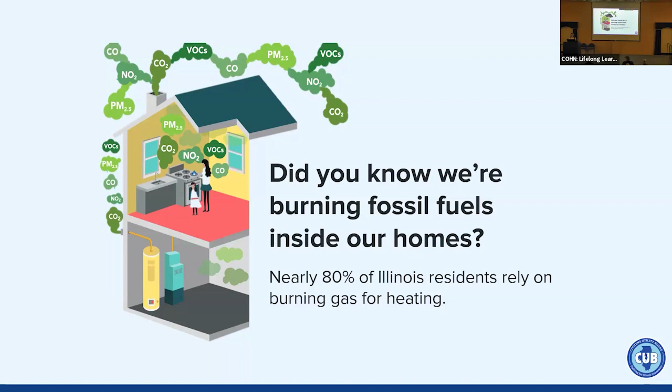There are 4 main ways that we do this inside of our home: space heating, water heating, cooking, and clothes drying. Obviously, the big ticket item there is going to be space heating, so that's the biggest way that we burn fossil fuels inside of our homes.

So what is building decarbonization? That may be a term that you've heard before. I've mentioned it a few times today. What it means is ensuring that the energy we use to power and heat our buildings doesn't result in further greenhouse gas emissions. This is really important for our emission goals and our climate goals because roughly two-thirds of our state's emissions come from buildings. So that's a really big portion of our emissions, right?

One way to do this is to electrify our homes and decarbonize our homes. Now, this is not a perfect fix, right? Our electricity grid is far from perfect and far from clean, but we are on a pathway to clean it up. There are pieces of legislation in Illinois, like the Climate and Equitable Jobs Act that passed in 2021, that put us on a path to achieve a carbon-free power sector by 2045. I think we're a little bit behind meeting those goals, but it's something we're working towards.

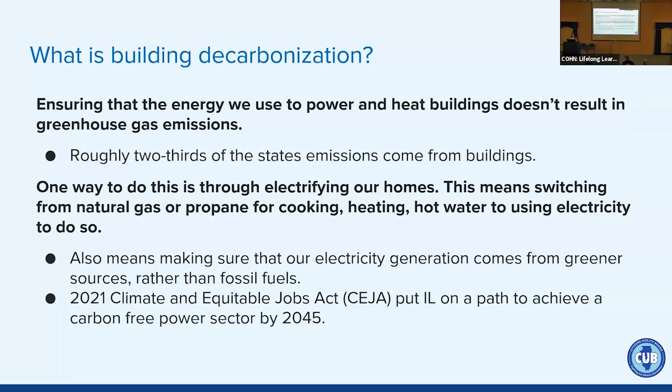So one way to reduce your greenhouse gas emissions in your home is through electrifying. I want to go over some of the main reasons you might be interested in decarbonizing. The 3 big ones are affordability, climate change, and your health. We'll go over these a little bit more in depth.

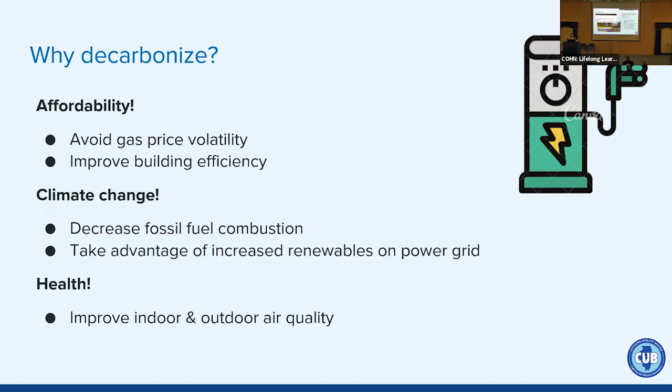So the first reason is affordability. Gas is expensive, not only the gas that we're using in our buildings, but the gas system itself is really expensive. We have some of the highest fixed fees in the Midwest here in Illinois. That's the amount you're paying regardless of how much gas you're using. In Peoples Gas territory and in Nicor Gas territory, it's about $30-$40 that you're paying a month, even if you were to use no gas.

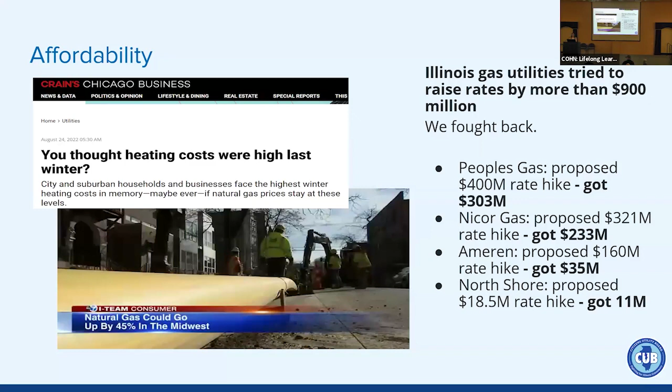Last year, Illinois gas utilities tried to raise our rates by more than $900 million. That's an immense and a record rate hike in the state of Illinois. Organizations like CUB fought back. We were able to rein in some of their spending, but as you can see, these are still incredibly high rate hikes. So we know that our gas system is old, it's inefficient, and it's unaffordable for a lot of people.

Another reason you might be interested in decarbonizing your home is for climate change. That's because natural gas is made up of predominantly methane, and methane has an incredible global warming capacity, over 84 times the global warming potential of CO2 over a 20-year time frame. Because our building sector is such a huge portion of our state's emissions, tackling the building sector is going to be really key to tackling climate change.

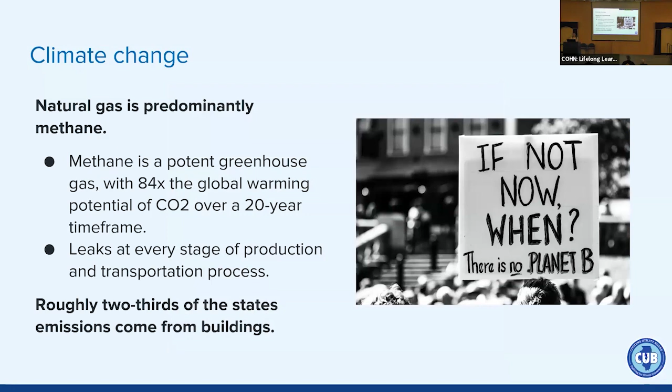The third reason is for cleaner indoor air. Gas burning appliances like your stove and water heater emit dangerous air pollution into our indoor air. This is things like nitrogen oxide, carbon monoxide, general particulate matter, formaldehyde, and benzene. And 21% of childhood asthma cases in Illinois are attributable to gas stove usage. That is the highest of any state in the nation.

I think this makes sense, right? Children are small, their lungs are smaller, they're spending a lot of time indoors, and so they are more susceptible. But that doesn't mean that burning gas inside of our homes isn't harmful for the rest of us as well.

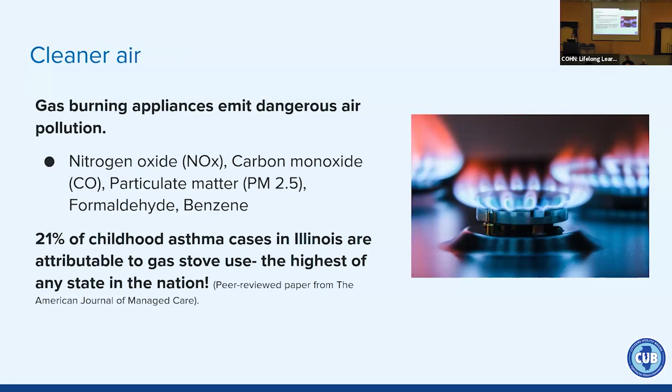But it's not all doom and gloom, don't worry. I'm going to go over geothermal specifically today, which is one of the technologies that we have to move beyond gas. There are 4 main ways that we burn fossil fuels inside of our homes: for space heating, for cooking, for water heating, and for clothes drying. We have the technology available on the market to transition away from these gas burning alternatives.

As you can see, their electric counterparts look really similar. So you can start to see how you might be able to swap out appliances you have at home, gas burning ones, for electric ones.

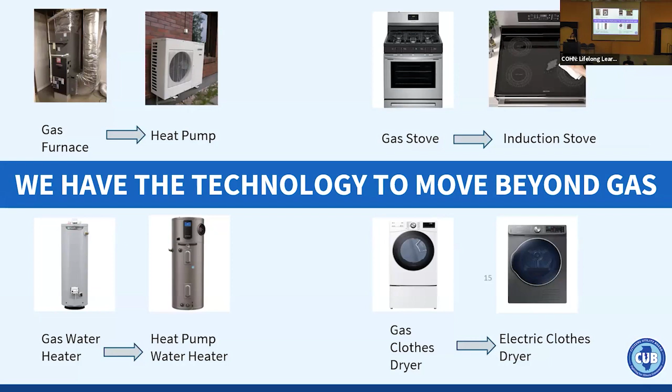Okay, heat pumps. I want to go over the very basics of how a heat pump works, and then we'll talk a little bit more specifically about ground source heat pumps, which is also sometimes called geothermal. So heat pumps, instead of burning a fuel to generate heat, simply move it from one location, called the source, to another location.

There are 2 main types of heat pumps: ground source and air source, and they both work really similarly. The major difference is that source we talked about, or where heat is being drawn from. That's either going to be from the air or from the ground, like the name implies. There are other technologies inside of our home that utilize this idea of moving heat or cooling from one side to the other rather than generating it.

One example is your refrigerator. Your refrigerator moves hot air from inside to the outside of the refrigerator, which is why on the back of the refrigerator, or at the side, it's a little warmer. That's because it's pushing that hot air out from the refrigerator into your kitchen.

So these technologies are not new, and heat pumps are going to be best suited for buildings with ducted and forced air systems. It's not impossible for other systems like radiator heating or floor heating, but it is going to be best suited and a more simple swap out if you have forced air.

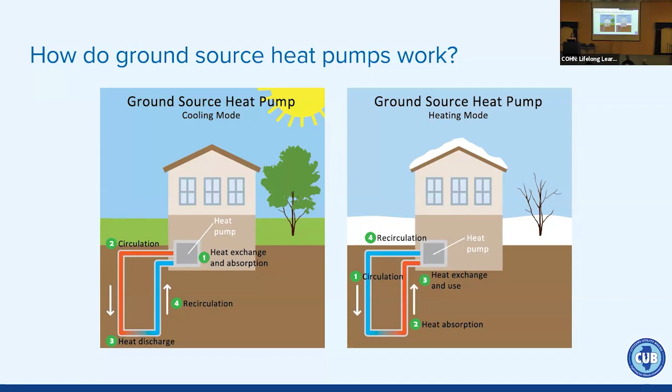Of course, these systems are a little bit more expensive. You have to first even think about digging these gigantic holes into the ground, and that's going to create a big barrier for a lot of people. But we're going to talk about how you might go about financing these types of projects in a minute.

But before we go, we cannot talk about heat pumps, we can't talk about decarbonization, without also talking about energy efficiency. That is because the cheapest and the cleanest energy is the energy that you simply don't use. The NRDC released a study that said every dollar spent on efficiency saves you $3 in energy costs, so it's a good investment of your money.

What might energy efficiency look like? It might look like weatherizing your home, using energy efficient lighting, unplugging your appliances when you go on vacation, utilizing your programmable thermostat, things like that. These are all things we can do to improve our energy efficiency. That's going to allow our electric appliances to run at their full capacity, use less electricity to begin with, and ultimately benefit our health, our wallets, and our environments.

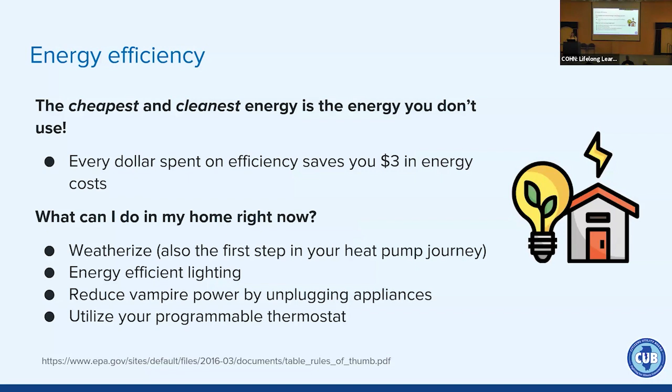If you are like, oh my God, I'm so excited about geothermal energy, I'm so excited about heat pumps, where do I start? This would be the place to start. It is called a home energy audit. It's going to make sure that your home has good insulation, that your building envelope is really tight, so that your electricity bills don't skyrocket when you switch over.

So this is a service. It should cost you a couple hundred dollars. There are also tax credits for it that we'll be going over shortly, don't worry, to help you subsidize that cost. But this is a really in-depth understanding and assessment of your home.

A home energy audit might tell you, oh, in your home, you're losing a vast majority of your energy through your windows. So then you would know, before I'm thinking about getting a geothermal heat pump or some other sort of heat pump, I really need to address the leakage happening in my windows. So this will give you a really good sense of where your building stands, especially if you live in an older, less efficient building. This is a really important first step to make sure those bills don't skyrocket when you switch over to electricity.

Okay, sorry to stick a chart at you so early in the morning. I know this is a little bit complex, but these are all of the consumer-facing tax credits and rebates available through the IRA, the Inflation Reduction Act. It passed in 2022. It is a very large investment to tackle the climate crisis and invest in clean energy across the country. These incentives, along with state incentives and utility incentives, are going to make the next couple of years some of the best times to make energy and efficiency upgrades to your home.

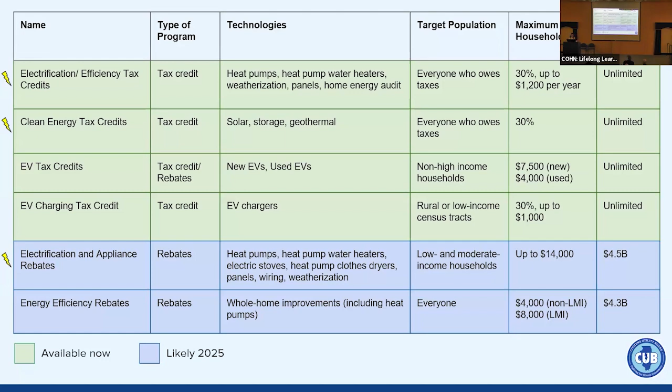We just talked about how important energy efficiency and weatherization is when you think about decarbonizing your home. This is the tax credit that helps subsidize those costs. Starting January 2023, and for each year for the next decade, all consumers can claim a tax credit for 30% of the cost of qualified projects, up to $1,200 annually. If you had multiple little things you needed to do in sequence, you could split up those projects over multiple years and access this credit.

So these are the caps. Of course, this is not tax guidance—I'm not a CPA, I'm just providing general guidance provided to us by the IRS. If you are planning on accessing any of these incentives, you should go on the IRS website and check with your tax person to make sure all the nuts and bolts are figured out.

There's also an additional one-time $2,000 tax credit for upgrading a space or water heater that does not count towards the annual tax credit. That means for 9 years you could qualify for the $1,200, and for 1 year you could claim that annual credit plus the one-time credit, for a total credit of $3,200.

The next is the residential clean energy tax credit, which includes geothermal heat pumps, the technology we just talked about. Starting January 2023, and for each year for the next decade, all consumers can claim a tax credit for 30% of the cost of qualified projects. You'll notice this does not have an annual cap. The credit percentage will phase down to 26% in 2033, and then they're looking to scale it down further.

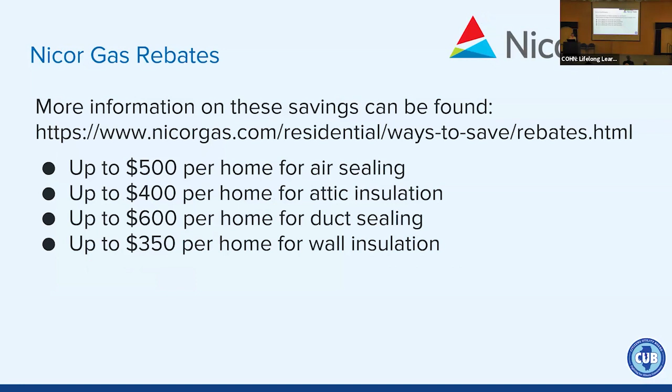Now, you may have heard of something called direct pay, which the proper term is elective pay, but most people say direct pay. Direct pay is part of the IRA, and for the first time, it allows tax-exempt and governmental entities to receive a payment equal to the full value of the tax credit for buildings qualifying in clean energy projects. In general, an applicable entity can use elective pay with respect to these 12 credits as long as it meets the tax credit's underlying requirements. There's many tax credits through the IRA, but only 12 of them are eligible for direct pay.

The steps for direct pay are a little bit different. So if you were thinking of a project for your house of worship or another tax-exempt entity, you would first identify the project and the credit you want to use, complete the project, place it into service, determine when that tax return will be due, and then you have to pre-file registration with the IRS before the tax return is due. Once you receive the registration number, you'll need that number to file the taxes for your tax-exempt entity, and then you would receive a direct payment for the amount that you've qualified for.

Okay, so these are just some of the energy generation and carbon capture tax credits that can be taken advantage of for tax-exempt entities. So if you are looking at something like geothermal, you would be looking at the investment tax credit for energy property.

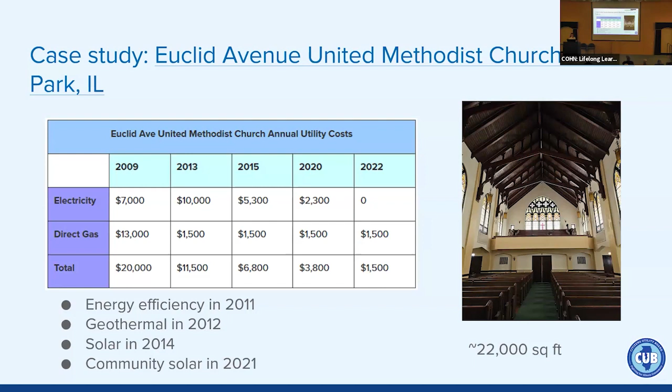And it covers a portion of their building's heating and cooling, which helps alleviate the gas burden as well as emissions, as well as some of the schools in the Glencoe School District. I know West Elementary School maintains around 40 wells alone. That sounds like maybe enough to do a whole wing of a building, but I'm not exactly sure—I couldn't find a lot of information about it. And then there's a Montessori school in Evanston that maintains 7 wells for a wing of their building.

I really suggest reaching out to these places to understand their lived experience if you're trying to take up a project like this. I want to go over the next steps with you if you're interested in this technology. The first thing we always say is that you need to start planning now. This is a long and tedious process—you cannot wait till your old heating and cooling system fails. Your installer will need time to route permitting papers through your municipality.

The second step is to do energy efficiency work—to weatherize your home or building. And the third is to shop around for a quality heat pump installer. We really recommend getting at least 3 quotes to make sure you're comfortable with an installer's professionalism, competency, their price, all of these things.

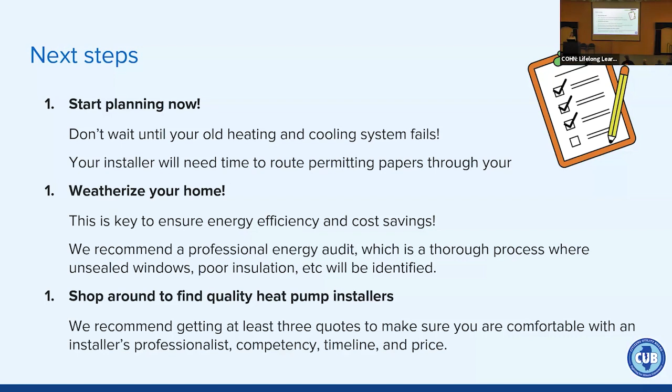One of the most asked questions we get at CUB is, do you have a list of contractors? Is there someone you can direct us to? Unfortunately, we do not maintain a list of contractors, and we do not vet contractors. But I do have some tips for you on how you might find a qualified installer.

The first is to check with your local network—check with those schools and churches we just talked about. I've also heard of people having enormous success in Facebook groups and community groups like this one. You can also look for contractors certified and trained through manufacturers, utility companies, or professional alliances. So if you wanted to take advantage of the ComEd incentives, you'd need to work with a contractor certified through their network—that might be a great place to start.

There are also professional associations like the Geothermal Alliance of Illinois, as well as the International Ground Source Heat Pump Association. Those places all maintain their own lists as well. That's a great place to start, although again, not foolproof.

And I think the final tip is just to ask questions. A contractor who is professional and wants to work with you will take the time to walk you through these questions. Some questions you might ask: How many heat pump systems have you personally designed and installed? Will I need to hire my own electrician to provide electrical work, which is likely the case if you live in an older building? Do you register the heat pump with a manufacturer? The answer should be yes.

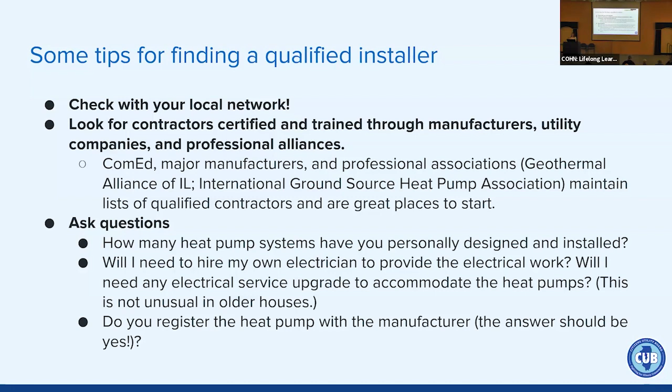Things like this. I know we covered a lot of information today, and I want to direct you to a resource on the Citizens Utility Board website. We have an entire page on electrification, so almost everything I've spoken about today can be found there. It's under our website—go to resources, then electrification. And I believe that is it for me.